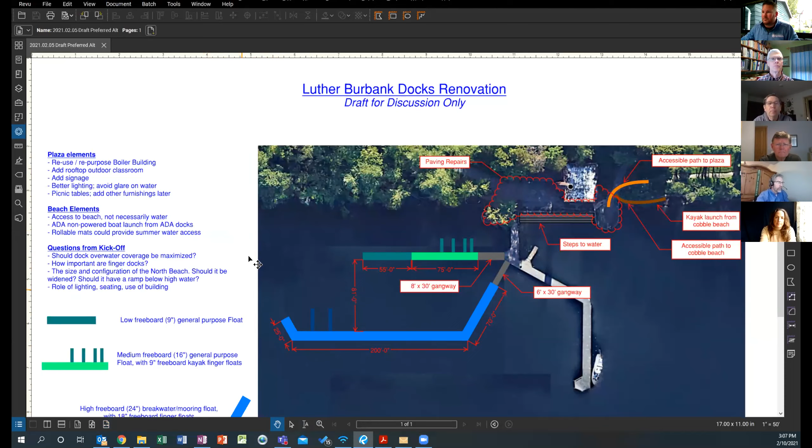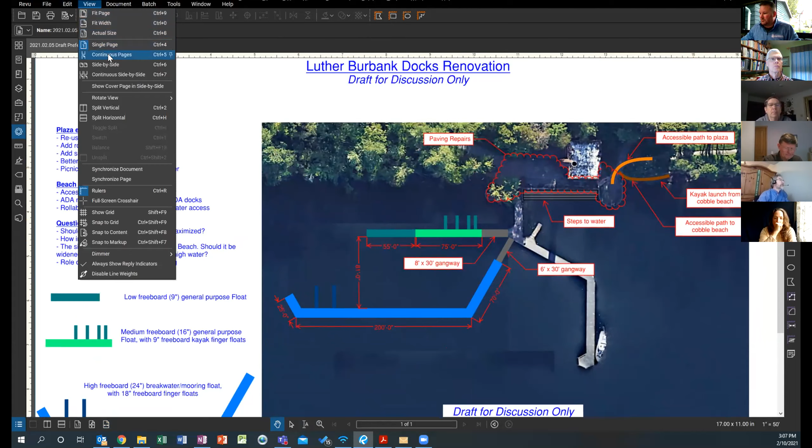So sharing my screen, and you should be able to see the alternative concept that had been sent a little earlier. And my intent on this is that I'm going to try to capture, there we go, try to capture your comments and the discussion on the screen here if I can. If it turns out that that's a little cumbersome, I'll take notes on the side and we'll send a revised plan after the meeting when I get a chance to clean it up.

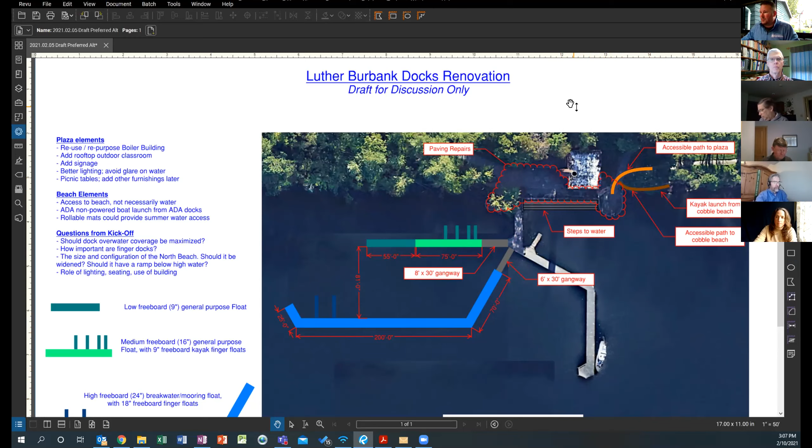But basically, what I did is I took the discussion that we had earlier on the kickoff, where we kind of heard your concerns and questions and comments on the three different alternatives that we had, and I tried to boil it down into some of the key elements and address some of the key issues that we discussed, and try to get kind of a single idea out there that we can add to, subtract from, tweak, whatever, but to start honing us in on a preferred alternative, and hopefully we can do that fairly efficiently here. So obviously, the big graphic is about the docks. They're a little bit easier to see and a little bit bigger, so easier to draw.

So that's kind of why they're here. And what I've done is, I think, having the two gangways and separating the powerboat float from the hand-powered launch float, and kind of providing some separation there was important. We can see just in this configuration, we've got about 80 feet between the floats,

and I put the finger floats for the small power boats out at the end to minimize, if anybody just wants those, they can just use the fingers there as opposed out here at the end, and try to keep this basin a little bit less busy for the small sailboats or kayaks or stand-up paddle boards or what have you that might be in this area. And the other thing is just added a little return on the other end, which provides better wave protection for the smaller boats that would be launched from the smaller float.

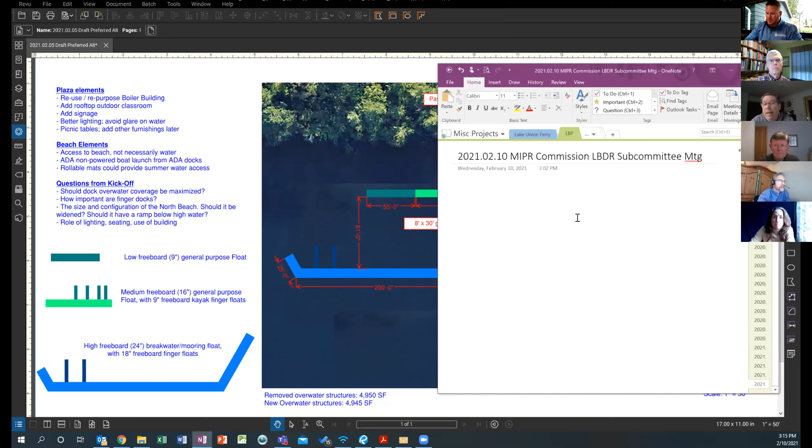Well, this is Commissioner Strzok. I can start with one question, Andy. So looking at the finger docks for the smaller boats, in color here on the schematic in green. So we have 4 finger docks shown. Right. What are just the pros and cons of why not 8? Or maybe I'll just say more. From a design or engineering perspective, is there any reason why we couldn't have more? I'm not advocating for it. I'm just trying to understand.

It takes away from the length of these other things. This concept does maximize the overwater coverage. You can see in the note, I think we're only leaving 5 square feet on the table. Okay. At this level, that's pretty rough. If we wanted more, then we'd be giving up some length on some of the other docks. And it becomes a few more elements, so it's going to be a little bit more expensive, but a square foot of finger dock is not a huge amount more than a square foot of other docks. You do have some connection details, so it's a little bit more complicated, but overwater coverage is your main trade-off.

Okay, so just so I understand. Looking at the dock for the non-powered craft primarily, the section toward the end there that does not have any finger docks, I presume the boats potentially on either side would basically just tie up parallel to the dock. Yes. Okay. And the same on the lighter green section here. Yeah. Okay. That's all I needed on that. I'll let somebody else talk.

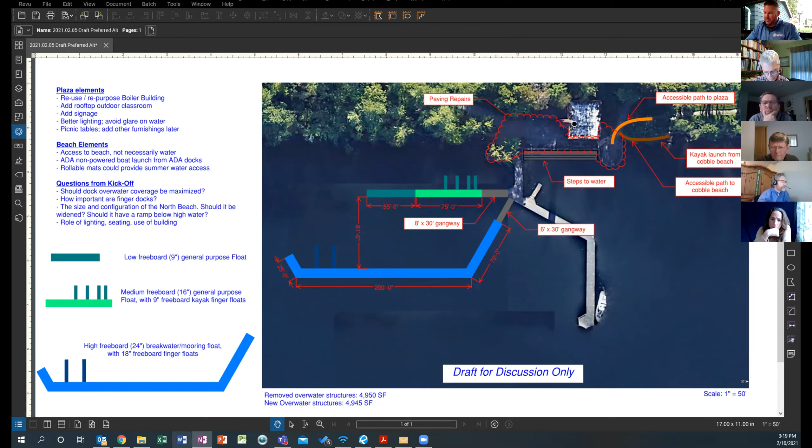So Andy, I had a couple of questions. One related to finger docks: generally, can finger docks be used from both sides? Is that the idea, that you could launch from either side of a finger dock? So yeah, I'll zoom in on that, since that's what we're talking about. So on this one in particular, that's nominally 1 kayak width here.

And the reason for that is, for ADA access, you kind of need to have access from both sides of a kayak to get into it and to kind of stabilize it. But for the rest of them, you would have one kayak here and one kayak here. And so you could have a kayak on each side and be able to get in when it's a low freeboard. There are places where the finger docks are close together, so you have one on either side. For kayaking, that's particularly great because you can put your paddle across the docks, and you've got something that's really stable to get into and out of the kayak.

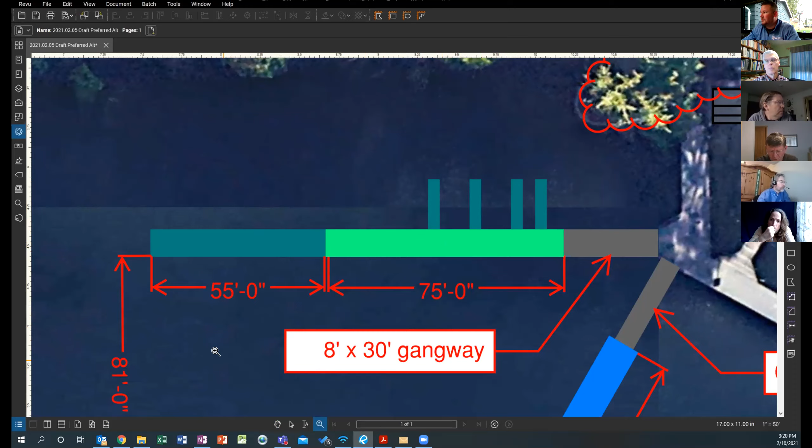But it's not necessary. So typically you would probably see something like this where two fingers would give you access for four kayaks. So in this drawing, the two that are closest together, that was done intentionally to show that would be an ADA compliant launch point? Yes. Okay. And is that the same idea with the finger docks for motorized craft, that they would be spaced to allow use from both sides? Yeah, these would be sized so that on these two finger docks, you would have room for four small power boats.

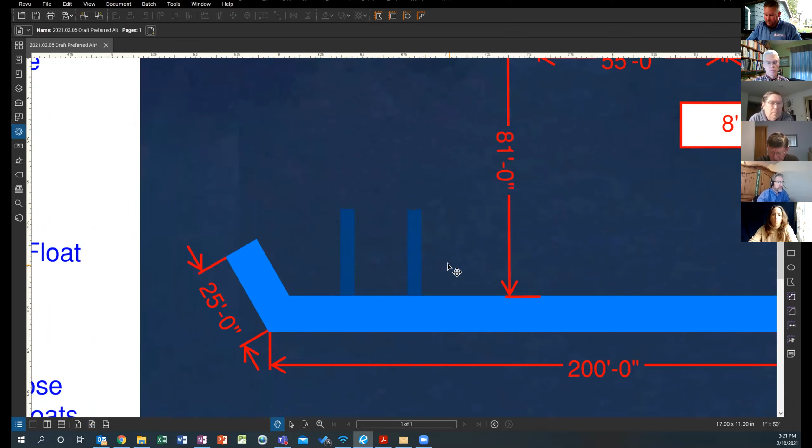Okay. And then the gangway out to the motorized dock at 6 feet wide, I just had a question as to whether or not that would allow for two-way foot traffic. Is that wide enough to accommodate that, or were we stuck with that just because of overwater coverage? No, that's wide enough for two-way foot traffic. It's not wide enough for two wheelchairs to pass each other, but that's not a design criteria, even for ADA facilities. And I've seen it occasionally on small passenger ferry terminals where you're getting a higher volume of people than you would here. The other one is a little wider, but that's because people are going to be carrying bigger things up and down.

Yeah. And is the assumption that there would be cleats along the length of the dock for small motorized boats? I don't know if we would use cleats or just a continuous tie rail. Or a rail, okay, but there would be some way to tie off boats along that whole 270 foot length? Yes. Even on the return here, that's 25 feet. You could conceivably have a couple boats there if you had a flotilla come in all at once.

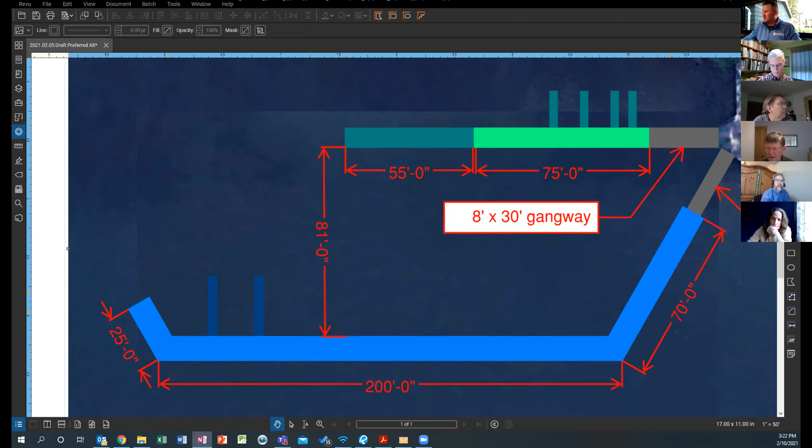And this is kind of unrelated to docks, but related to the issue of overwater coverage. Would the stairway count against that overwater coverage number, or is that a totally different issue? That would definitely factor into the permitting. It is overwater coverage, and it would be on the bottom, so you're actually disturbing existing habitat, which is the lake bed, and something like that ramps your permitting requirements up a little bit more. And I've not included that in the overwater coverage calculation at the bottom of the figure here. That calculation is just for the floating docks. Okay. The steps to the water, one, increase your permitting risk, and two, general construction would add considerable cost to the project.

Okay. So it's kind of standalone then with regard to the issue of overwater coverage. We treat it as a totally separate element. It would be all part of the same permit package if we wanted to go that way, and the agencies want to see everything in one package. They don't like piecemeal packages. But if the intent were to build that, then we would have to do more mitigation work to offset the impacts of that particular piece of construction.

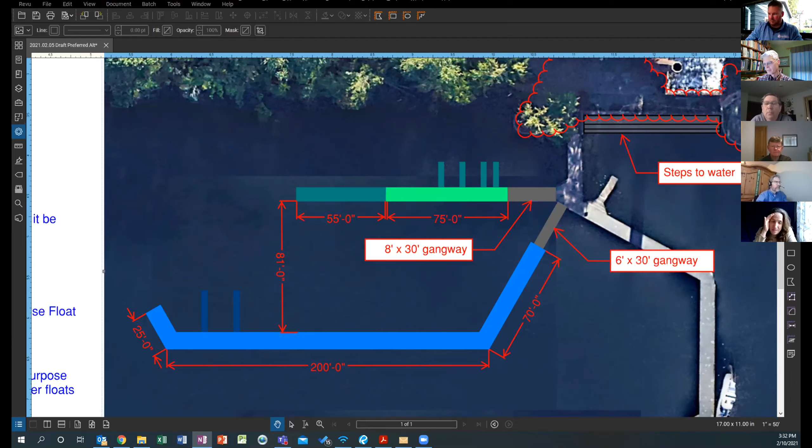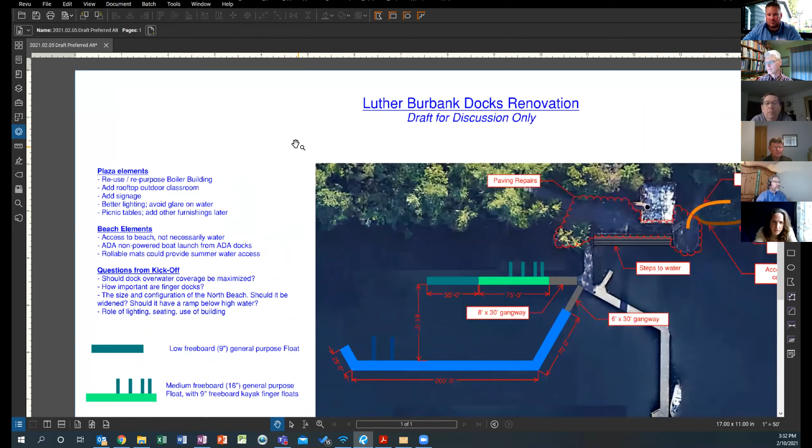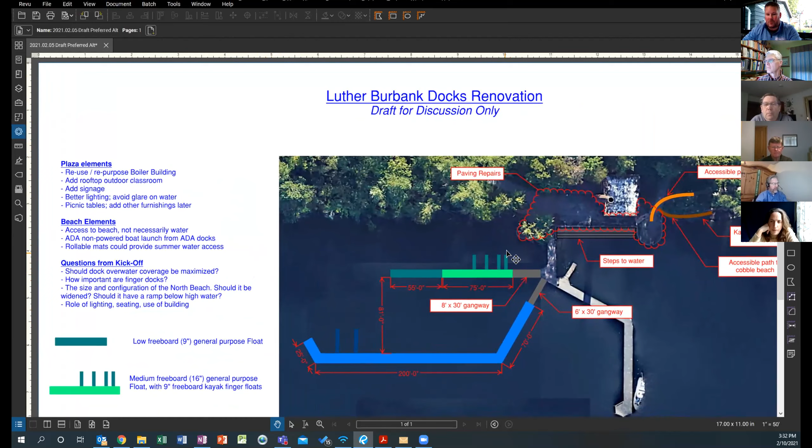And also related to that, Andy, if you could zoom out, in your notes on the left, it said something about ADA docks, boat launch from ADA docks. Are you talking about this little finger dock, or what's the ADA dock? Yeah, we would configure this area specifically to accommodate an ADA kayak launch here. There's a couple of different versions on the market, and we would try to build one of those, or come up with our own, but incorporate an ADA kayak launch here.

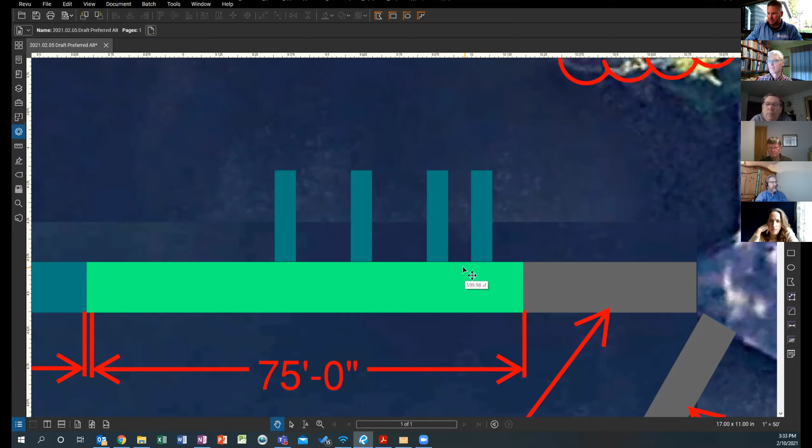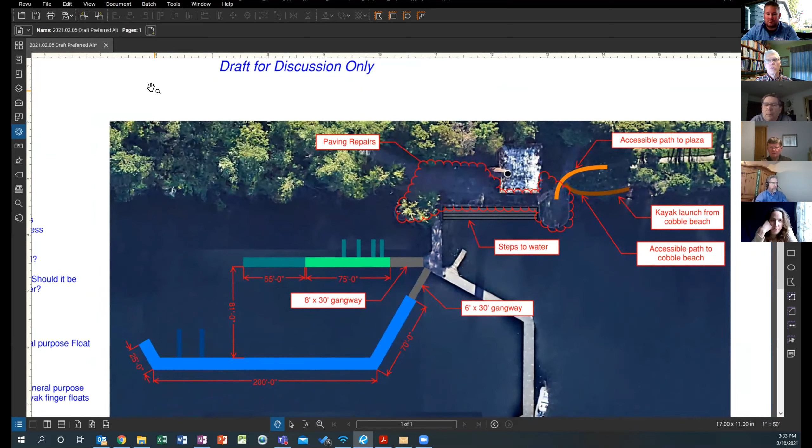But didn't we, Paul, do you remember this discussion? Was it in the summer or at the last meeting? Didn't the ADA people say we'd rather launch from a beach than a dock? It's kind of complicated to get someone in a kayak. I would rather launch my kayak from a beach rather than a dock too. So I actually had Tim Nagel from Outdoors for All down at the docks during the open house, and we looked at all of this together. Basically, different people with different types of disabilities need different things.

The paraplegic wheelchair user who has strong upper body and coordination, which is Tim, and also Rory Calhoun from RCO, like to launch from docks into a kayak from their wheelchair. But Outdoors for All serves a wide range of abilities, and for a lot of those people, launching from a beach is easier. Tim's conclusion was that they're used to launching kayaks from beaches. What they don't usually have at a site is the launch from the dock. So if you're going to put ADA into this project, focus on the dock. Give us access to the beach, and we can work with whatever is there with our clients.

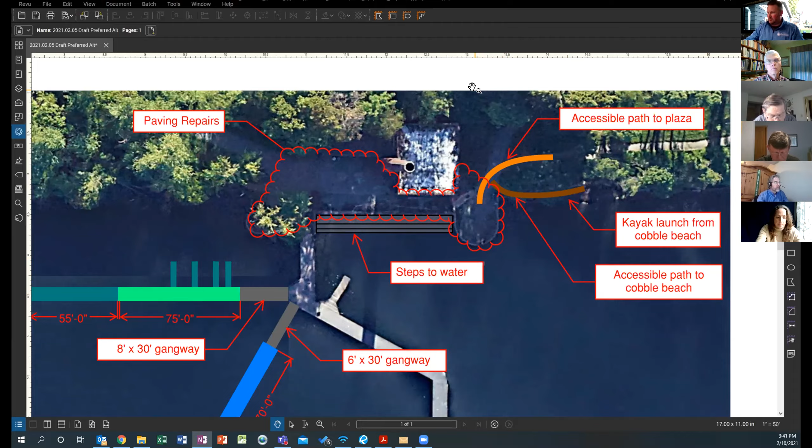Another question that's on the page under kickoff here, regarding the beach: should it be widened? I think we may have talked about that last time too, but any thoughts on that one? Yeah, I think if it were widened, we'd probably have to do some kind of retaining wall against the back of it to maintain that shallow grade, because you do have that fairly steep slope coming down. But that work would be above ordinary high water, so it's more manageable.

This is Commissioner Westberg, and we were talking about the widening, I think, in the context of creating more space for youth programs and kayaking classes and things like that. And I was actually just down there the other day, walking around and looking it over. And I was wondering how much room there is to widen the beach, and would it jeopardize any of the tree plantings along that area if we did that? You know, if we cut back into that slope and put a retaining wall, are we going to lose any trees?

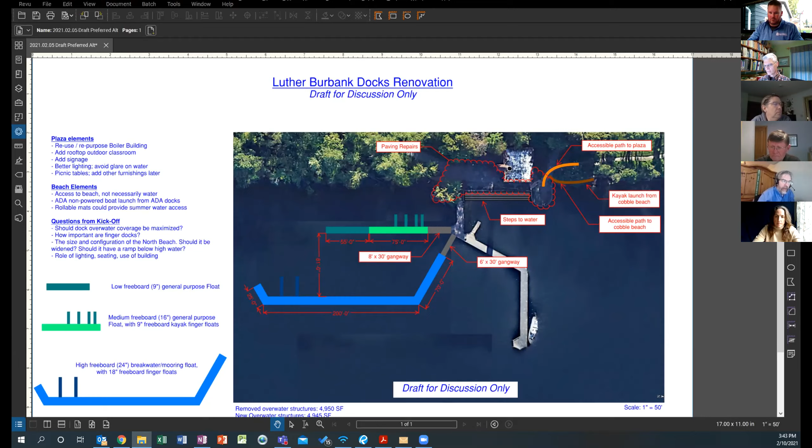Yeah, I'd have to look at exactly where the trees are. We try to do that to minimize any of the trees. I think most of the trees are further back, closer to the path. Right. But there are some that are along the water, and we would minimize that impact as much as we could if we did want to widen the beach.

I can answer that also. This is Paul West. In the area, the ramp would extend parallel to the beach, and I imagine the wider beach would be starting somewhere about where the arrow points to, the saying kayak launch from Cobble Beach. Currently, there's two smaller trees on that bank. They're both root suckers from the surrounding Lombardy poplars, and the trees are maybe 20 feet tall and maybe 4 to 6 inches in diameter.

They're not large trees, and they're volunteer trees that are really not in great condition. So I have to say that yes, there's two trees that would have to come out if that's the area we're talking about. But they're not the large Lombardy poplars that you see along the rest of the shoreline, and they're not in great shape. Okay.

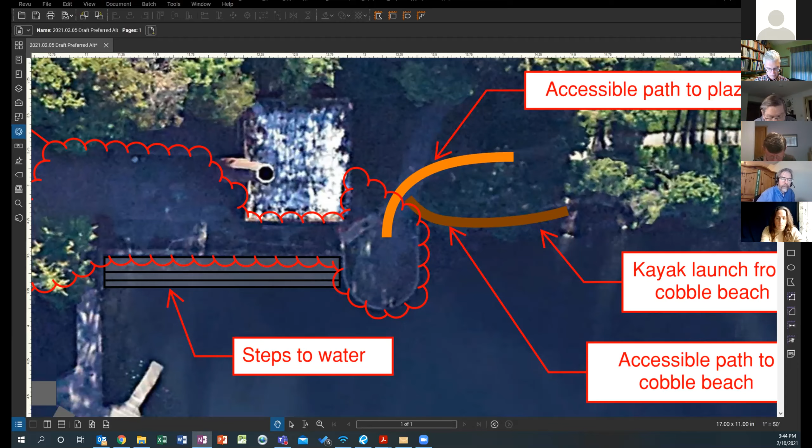So, okay, well, I guess when we get to the next page, we'll kind of have a vote on this, but that's good. Just looking again down these lists of elements, are there any other, I would call it just really more questions about either what is in the schematic specifically, or did you think about this kind of thing?

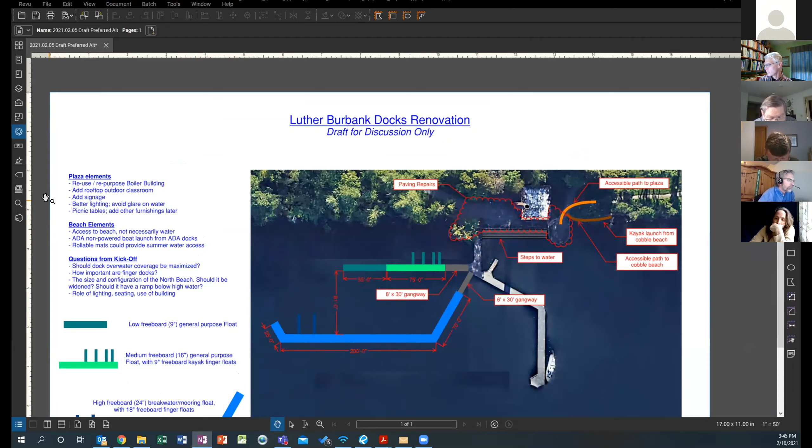Yeah, this is Commissioner Westberg. I had a couple of questions and comments, so I'll just shoot. So with regard to the rooftop classroom on the flat portion of the building adjacent to the boiler building, is the current structure sufficient to support that type of use without doing a lot of rehab? Do you have any idea from the earlier boiler building study, Paul? Yes, it is. The architect looked at the structure of the restrooms and determined that it supports the loads needed for a rooftop classroom. Okay, and how would you get access up there, particularly ADA access?

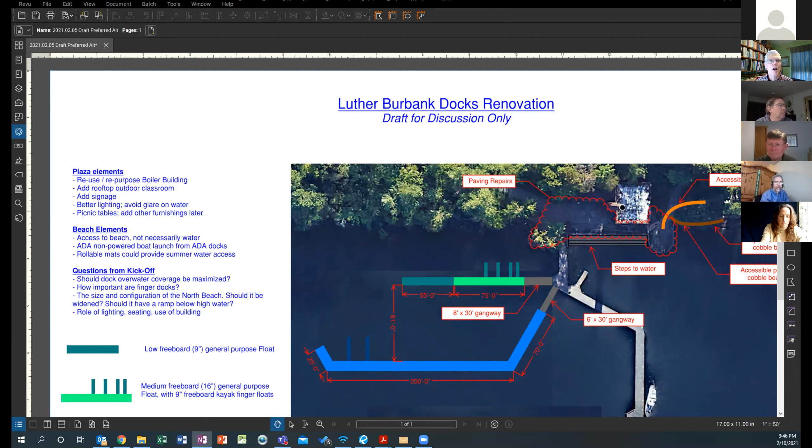The access would come on a ramp. If you're looking at the draft preferred alternative, you see there's a line, the flag paving repairs. Right where that line hits the bubble, there would be a ramp that starts roughly there, kind of where the driveway comes down the hill and meets the plaza. There'd be a ramp starting there, and it would go up at ADA grades to the backside of that classroom. At some point it would hit the grade of the classroom, and then you walk out onto the classroom.

And that ramp, in the big scheme of things, would continue north, behind the boiler building, provide access to the boiler building, and then continue north up to the parking lot. So that's the concept that, fully realized, would provide full ADA access to all the elements of this site. It would go all the way up, so it would cross the existing path that comes down steeply and reach a switchback or something, and then go back up?

Yeah, so it traverses across the slope, almost to the Luther Burbank Administration Building, and then it switches back to meet up with the covered walkway, and the existing steep driveway on the north side of the boiler building would be demolished and replaced with a set of steps that would meet that same pathway. So you could come partway down and then come down the steps, or you could continue on in a wheelchair, or just take an easier grade on the continued ramp structure that goes behind the building. Okay.

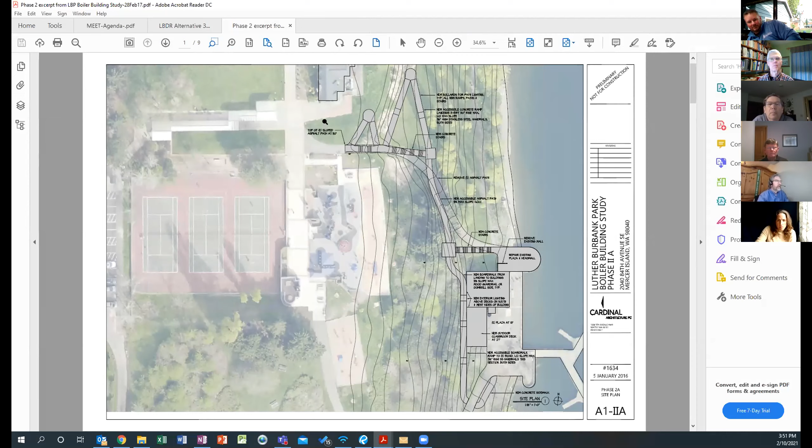And just to clarify what Paul was saying, I found the study, and actually I can rotate this to zoom in and make it a little easier to see what we're talking about. But this is the path, it would come in from this existing path. You'd have a landing at the height of the rooftop classroom, and then the path would continue over and do a couple switchbacks to come up here. So that's the previous study, and then the existing path would be gone, but there would be some stairs coming down from an enhanced landing/plaza part way up.

So then you get to the winter, you still have a lot of pedestrians or park walkers coming down on a sunny day like yesterday. And if there were picnic tables or some type of seating up there, the view up there, I think, would be fantastic. And then it has the added benefit Ryan just mentioned that it moves a lot of the congestion away from that plaza area. Because the one thing I noticed is that plaza area needs to be kept as open as possible, because most park users are either coming off a boat and walking into it, or just walking through it, and maybe you stop to gaze across the water.

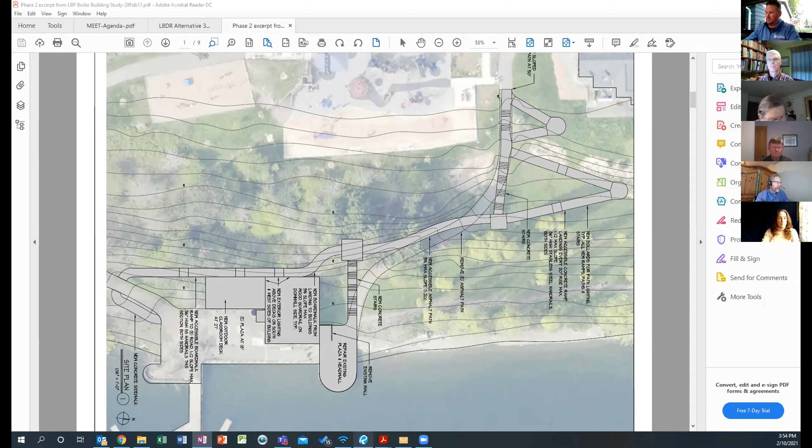Any other questions? And if not, I think we'll move to the elements page that Paul provided, and we'll revisit some of this stuff here, hopefully fairly quickly.

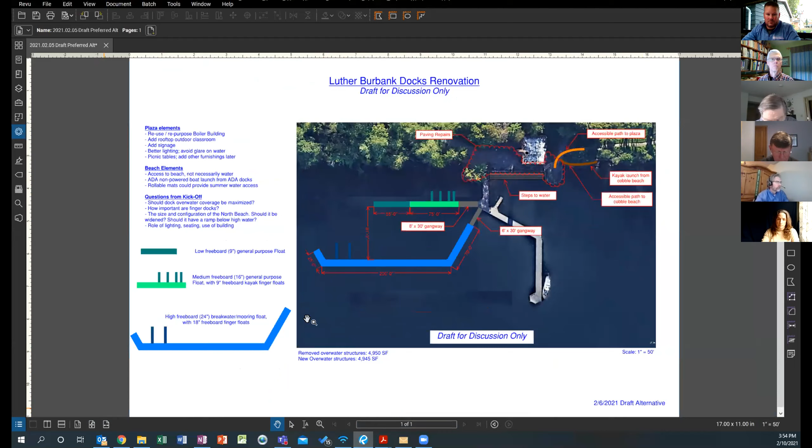All right, I'll stop sharing and give it back to you, Paul. Yeah. I did have a comment on the plaza and the paving, and I don't know whether we'll get to that when we talk about elements or. Well, actually, why don't you just bring it up now? Because actually under plaza activation on the sheet, there is pavement. So I guess we can wait.

Sorry about that. So why don't we move to the other attachment, which was the elements and status. And this is a document that Paul put together. And again, it has several, I'll call them criteria or elements. And then the second column is a status from the first meeting, where I think, again, Paul and others tried to conclude or summarize kind of where we landed, and then kind of where the status is in the prelim concept.

And I'm going to ask Paul to kind of walk through this, to make sure that on each one of the items, if he's needing to move the process forward, if he's needing more input or kind of a consensus, that we reach that. And again, some of these things we've probably discussed at length, so they'll go pretty quickly, and other ones might be new. So Paul, I'll hand it over to you.

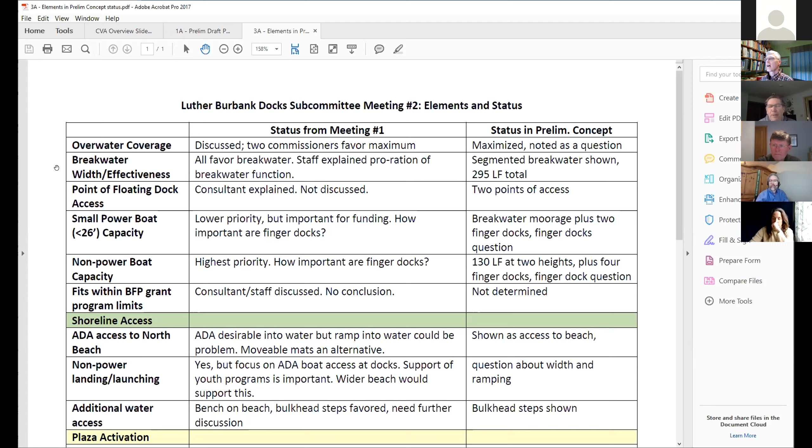You're on mute, Paul. Still on mute. There we go. Everybody see the screen that I'm sharing?

Yep, great. Okay, so I'm going to just go down the list. Overwater coverage. Currently, the preliminary concept has that maximized, but it was also noted as a question because at the last meeting, Commissioner Gualtieri spoke in favor of reducing overwater coverage. So this is the chance to find out if we have consensus on that. I'm fine with where we are now. Okay, great. So check.

Breakwater width and effectiveness. The current concept has the segmented breakwater shown. Do we have consensus on that? Yeah. Maybe you could just give a thumbs up if it's good. Okay. Great. The points of access. The choice was between 1 or 2. Commissioner Struck raised that last meeting. Currently, the preliminary concept shows 2 points of access. We have consensus on that. Great. I see 2. 3 thumbs up.

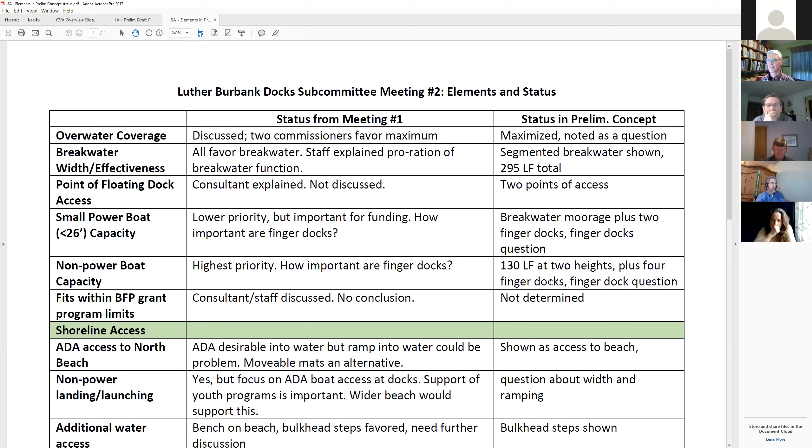I think Paul, on that, we've 130 linear feet at just one side of the dock. That's right. So if we take both sides of the 55-foot dock, that's 110 plus 75 to 185. We're well over 200 linear feet, excluding the area set aside for the finger dock. So, just to be clear that both sides are accessible for moorage. Yeah, and I think the moorage as depicted is accepted. We're going to skip fits within the program limits. I think maybe Andy and I will work a little bit on that question between now and the next meeting.

Okay, so let's go to shoreline access, ADA access to the North Beach. The ramp is shown. We understand that it's desired to be as naturalistic as possible and still conform to ADA. We have consensus on that. So this is Commissioner Struck, just so I'm clear. From my discussion a few minutes ago, and I think on the diagram, there is no ramp into the water, right? No fixed ramp, correct? Mats, right, or something? And we talked about the movable mats. So yeah, I'm good with that.

Okay, great. I think this is Commissioner Westberg. I think we have agreement on the idea of providing ADA access to the beach, and we still have questions about how that would be done in terms of the pathway and the materials and construction and all of that. But yes, definitely to the idea that the project includes that. Yeah, this is Commissioner Struck. Thank you, Roy, for that clarification. Okay, Paul. Okay, I've noted that those are elements to be determined.

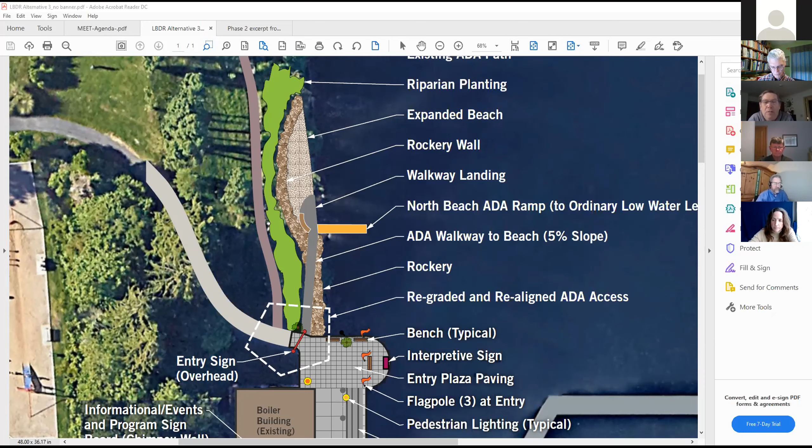And this is Commissioner Struck, and I think, Paul, you mentioned just a little bit ago, talking about this beach area, that all the trees that potentially would have to be eliminated or dug up in this beach expansion, I'm not sure what the right term is, they're not great trees, if you will. Or maybe the other way to put it would be, I think one of the principles that at least some people expressed was no net loss of tree canopy, that there would be ways to mitigate this issue or not. I believe there would be. We would definitely want to plant trees for shoreline shading, whatever we do.

Okay. And currently there's not many trees in that area. There's just these 2 spindly poplar suckers. So I think that, yes, we can mitigate. That still means that we've lost canopy when we cut those 2 trees down, but we ultimately get more canopy over the long term because we've planted more of the right tree for the right place.

And we don't really know yet. I think I might be getting ahead of myself because we really need to design this more before we know how many trees are impacted. So we may have to come back to the commission at some point and say, look, this is how many trees we now know are going to be impacted, and this is how we propose to mitigate that. So there may still be work to do there. I don't think we're going to get to the final answer in this concept plan.

So this is Commissioner Westberg. Just to clarify, the schematic that Andy is showing us, which was alternative 3, not only widens but also lengthens the existing beach, does it not?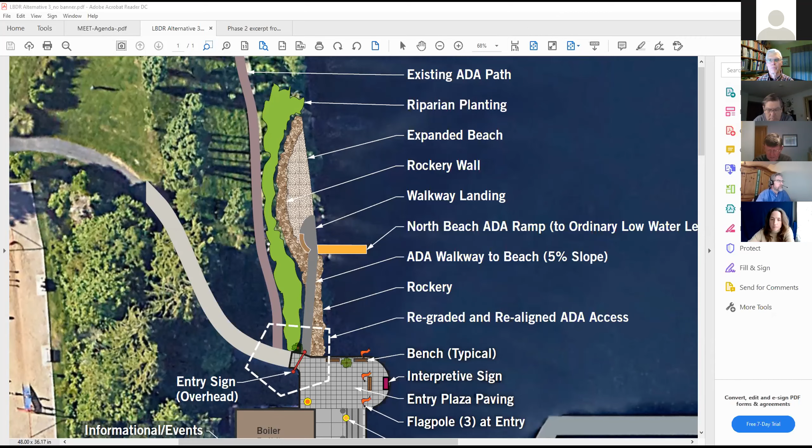Okay. So I'm going to reshare my screen. And so where we landed is to proceed with design of this beach, but have more input on it. And I want to just clarify, by public input, is the Parks and Rec Commission the right forum for that public input? Commissioner Struck? Well, that could be one. I was actually thinking if there's going to be a town hall or community engagement, get their input as well. But I guess we would start with the full commission. Okay. I'm asking because I don't foresee another engagement process like we've done up till now. Right. Well, then we'll just go with the full commission. Okay, great. So everybody's cool with where we're at?

This is Commissioner Westberg. Yes, I'm cool with where we're at, but just to clarify where we go with that. So we bring it back to the full commission when we're presenting this preferred alternative, and then it would be included in the 30% design, right? Right, and at 30% design, Peter, Andy, correct me if I'm wrong, we should know about tree impacts. Yes. Yep. Okay. And then that 30% design is open to public comment. We're not going to run another public process. It would go through the Parks and Rec Commission. Okay. All right. Just to clarify. Thank you.

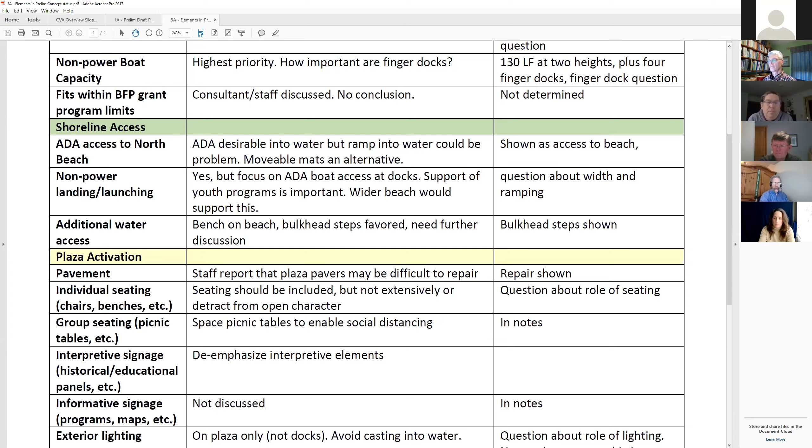This is Commissioner Westberg. That would be great. I just have a question for Paul. There aren't enough of the old pavers left, are there, to redo the whole plaza area? You cannot get the old pavers, and we don't have enough. Actually, that's why we have that gravel area on the north end, because we had to salvage pavers from there to repair the Hanson bollards.

Yeah. We put the gravel down because we knew we would be redoing that plaza at some point, and we didn't want to redo it now, not knowing what the big picture was. So that gravel is just a temporary surfacing until we have this plan in place. Right. So simply reusing what was there is not an option. We've got to come up with a new approach. Okay. So we're going to come back on the 22nd with pavement options.

Individual seating is the next. At the last meeting, the comment was seating should be included, but not extensively or detract from the open character. I think that was a reference to having lots of picnic tables in the main plaza area. In the current preferred alternative, there's a question about the role of seating. We may not get an exact number, but if we could hear from commissioners about picnic tables versus benches, or the mix of those two things, that would be helpful. Maybe we could come back with a proposal on the 22nd if we hear from you more specifically now.

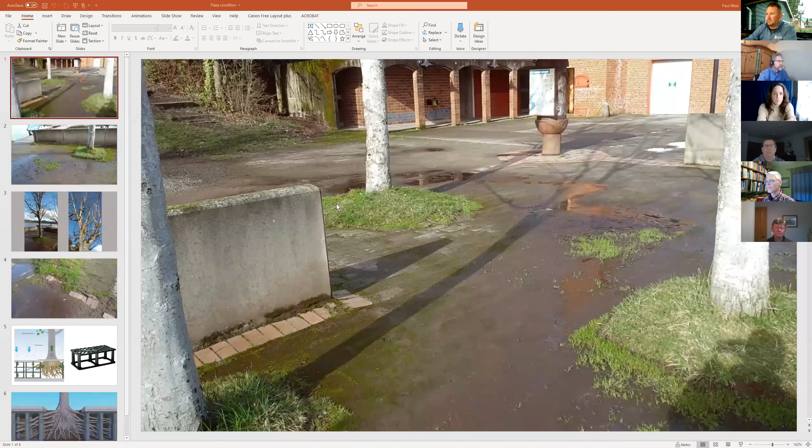Here's the picture of the existing location. These trees were planted in 1974 when the plaza was built, and the roots seem to be very constrained, and there are actually not a lot of roots under the plaza. They're mostly just constrained into the planting pits, and so they've mounded up in this configuration that you see. And the other problem, you can see in this first picture, is that the plaza around the trees has settled, or maybe the trees have raised the plaza. Anyway, there's low spots that are poorly drained now and are collecting water and dirt.

And then the tree condition: two of the trees are not in bad shape. One of them, the one that's closest to the dock entry, is in fairly poor shape. It's got a lot of dead wood, and it's not growing very well. And there is some root heave in the plaza pavement. Here's a root that's heaving the brick edge band. I just wanted to point these things out because do we really want to preserve these trees for the next 40 years? Will these trees live for the next 40 years? Is there something else? And are these trees in the right location for the next 40 years? They're fairly close together, and they crowd that area to the south of the docks. I'm going to stop sharing my screen.

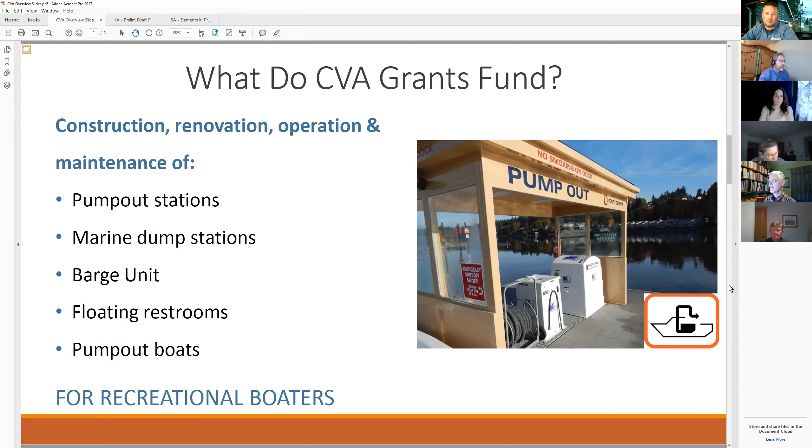So the Clean Vessel Act grant funds provide 75% of the funding for construction, renovation, operation and maintenance of pump out stations and dump stations and pump out boats. What we're talking about for the docks here is a pump out facility. And that would be something like this configuration where there's a pump container, and then there's a hose reel container of some sort, and then the plumbing and electrical to connect this back to the sewage pump that's in the waterfront plaza at the boiler building. It would involve running both plumbing and electrical out on the dock.